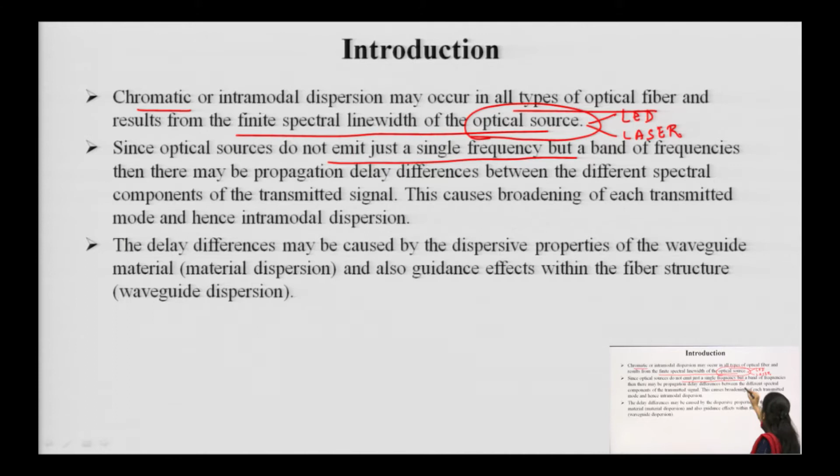Since optical sources do not emit just a single frequency but a band of frequencies, there is a propagation delay difference between the different spectral components of the transmitted signal. What does it mean? Normally any type of optical source does not emit a single frequency of light; it emits a band of frequencies. So, there always exists a propagation delay.

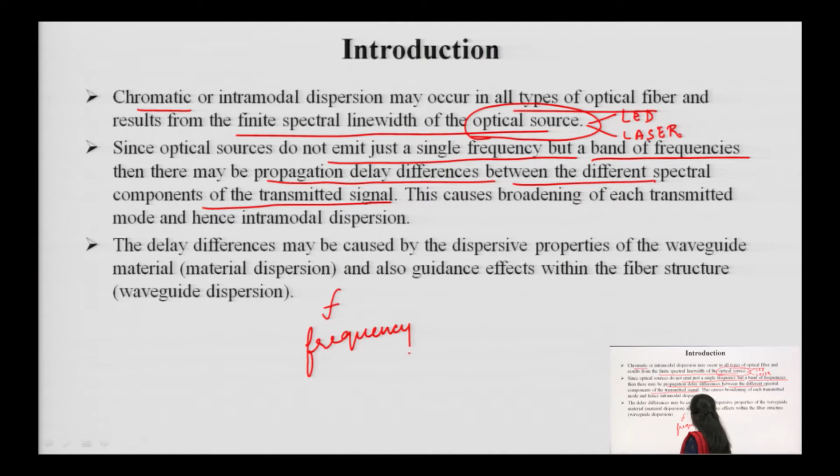As we know, frequency is equal to C by lambda, where lambda is our wavelength and C is the velocity. So, if there is a different frequency, then of course velocity changes as per that. If we have signals of different frequency, velocity changes accordingly, and as per that we have a delay difference, because distance is also related to velocity.

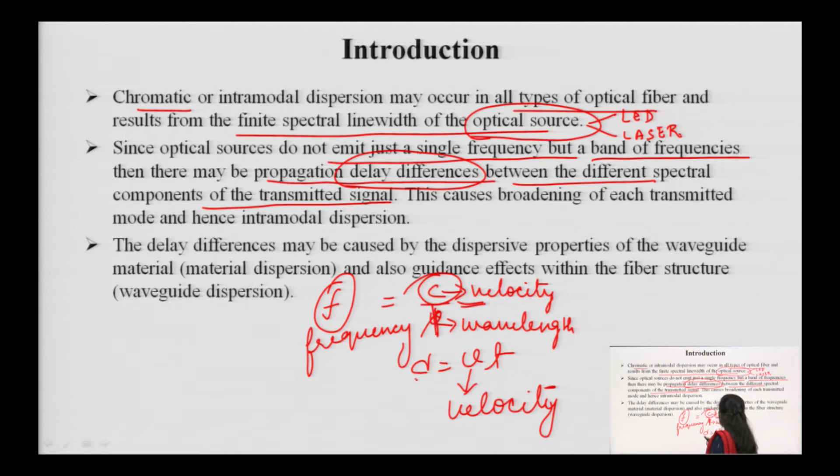In general terms, and in communication also, it is related to velocity, related to time, and distance is related to velocity. So, delay difference is also related to our velocity and in turn to the frequency. This causes broadening of each transmitted mode, and hence it is called the intramodal dispersion. Whenever there is a broadening due to this, it is called the intramodal dispersion.

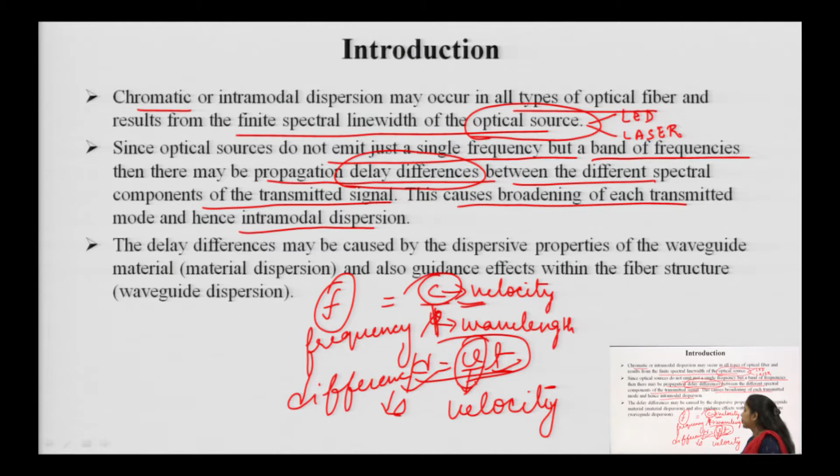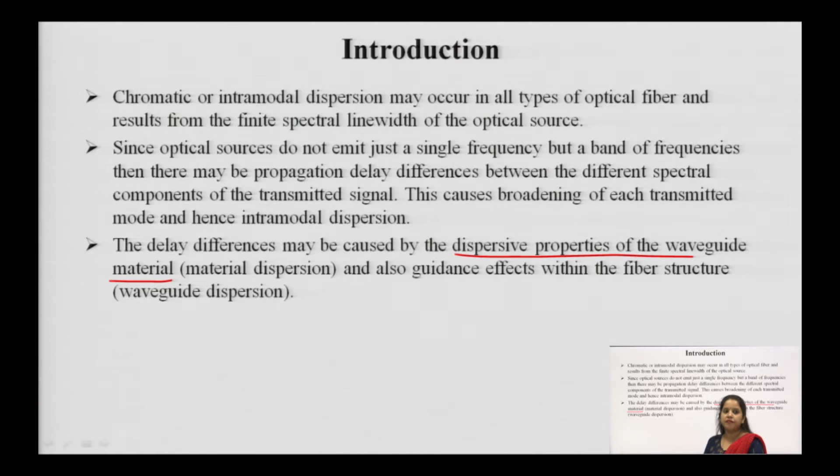So, dispersion delay difference may be caused by the dispersive property of the waveguide material, that is, the materials which are used have got some dispersive property, and if delay difference is caused by that, then it is called material dispersion. And if delay difference is caused by the guidance effect within the fiber, within the optical fiber more precisely, then that is called the waveguide dispersion.

Again, just a recap: intramodal dispersion is also called chromatic dispersion, and it occurs in all types of fiber, and it results due to the finite spectral line width of the optical source. So, the optical source is responsible for that. So, we have to choose the optical source by seeing its finite spectral line width, since optical sources do not emit a single frequency of light; they emit a band of frequencies.

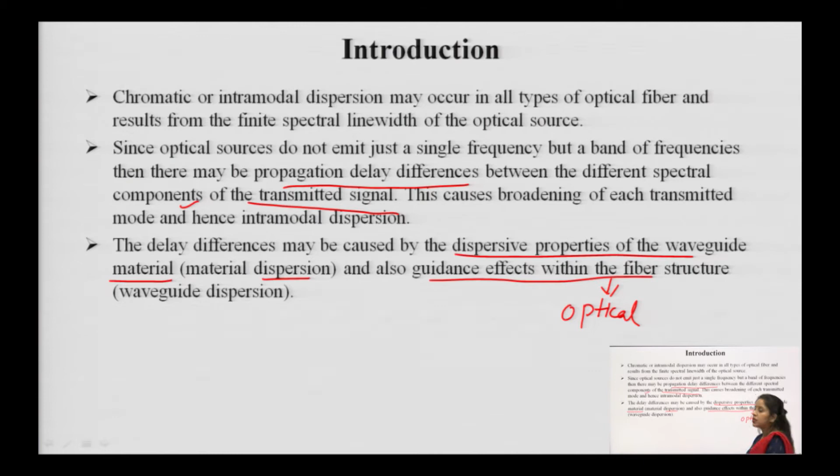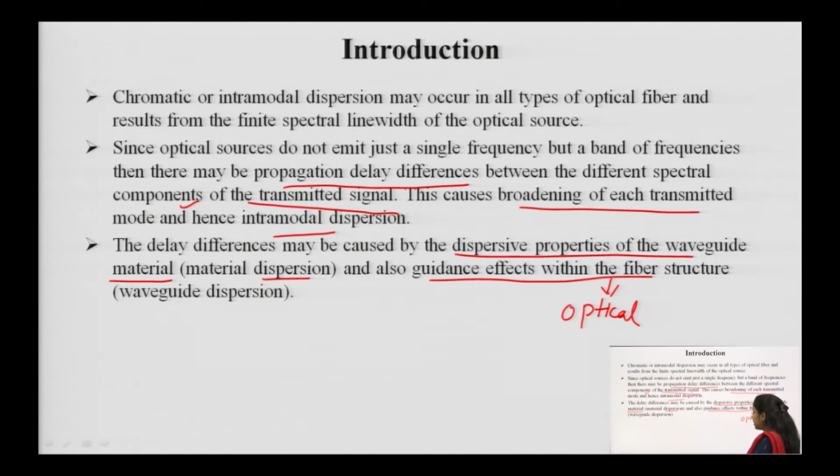So, there exists a propagation delay difference between the different components of the transmitted signal, that means different components at different frequencies of the transmitted signal, and this causes the broadening of each transmitted mode, and hence it is called intramodal dispersion. Whenever broadening occurs, this is a dispersion. It has got two types: the first one is material dispersion, and the second one is waveguide dispersion.

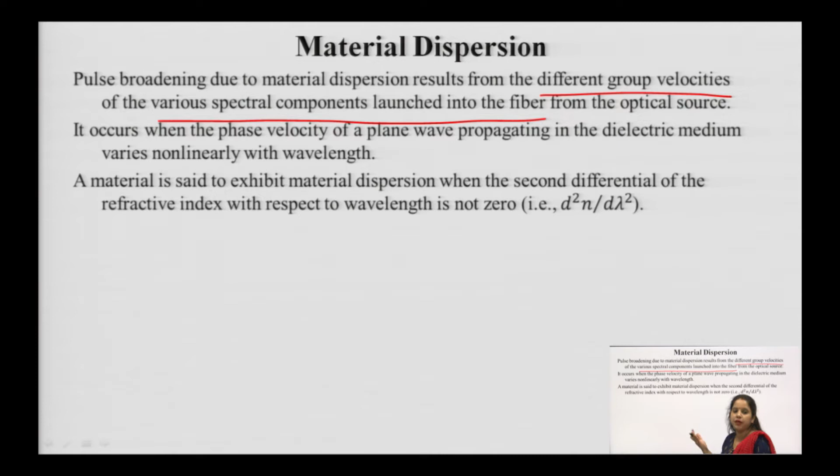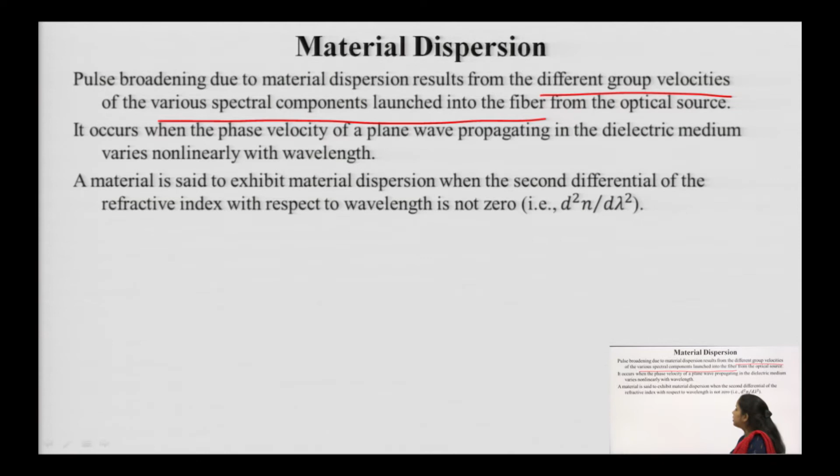So, pulse broadening due to material dispersion results from the different group velocities of various spectral components launched into the fiber. The light launched into the fiber has got different spectral components, and the group velocity of each is different; that leads to pulse broadening due to material dispersion. It occurs when the phase velocity of a plane wave propagating in a dielectric medium varies non-linearly with the wavelength.

So, again a condition arises that the phase velocity of the plane wave propagating inside the dielectric medium varies non-linearly with the wavelength. About the non-linearity and linearity conditions we have already discussed in the previous lectures. And one more condition: a material is said to exhibit material dispersion when the second differentiation of the refractive index with respect to wavelength is not 0.

That means, what is the refractive index here? Refractive index is given by this term, and the second differentiation, that means d squared n with respect to wavelength, should not be equal to 0. So, whenever any equation comes with respect to material dispersion, this condition is always applicable.

Now, let us get a knowledge about the pulse broadening, how much broadening is taking place due to material dispersion, what will be the value of broadening, that is, the value of dispersion, because the dispersion parameter can be measured with the help of pulse broadening only. So, we are going to discuss it for material dispersion, and this is a very important topic which you have to study carefully.

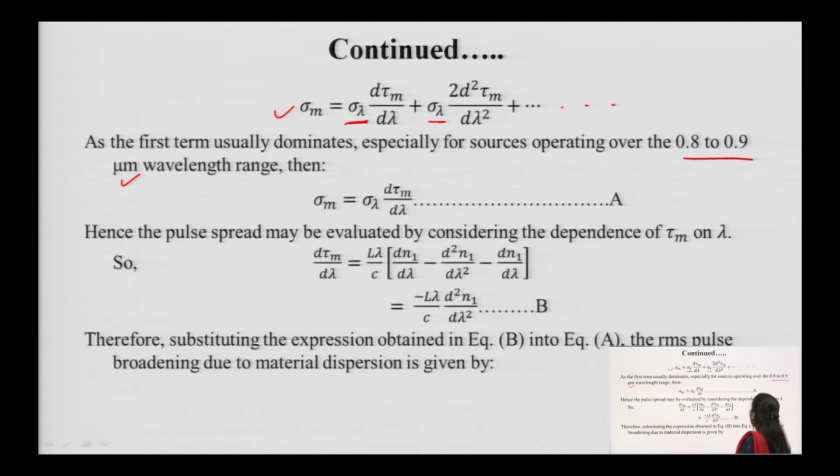This is the expansion in the form of a Taylor series, but the first term usually dominates, especially for a source operating over the range of 0.8 to 0.9 micrometer wavelength. So, we have taken only the first term and discarded the higher order terms. So, we get sigma m, our RMS pulse broadening due to material dispersion, equal to sigma lambda, the RMS spectral line width, times d tau m by d lambda.

Hence, the pulse spread may be evaluated by considering the dependence of tau m on lambda. Of course, tau m is dependent upon lambda. So, for calculating the pulse width, we have to differentiate tau m with respect to lambda. So, where is our tau m?

Tau m is this one. We have to differentiate this with respect to lambda. So, what we have to do? We have to take d upon d lambda, and what is the value? L by C, n1 minus lambda dn1 upon d lambda. L by C n1.

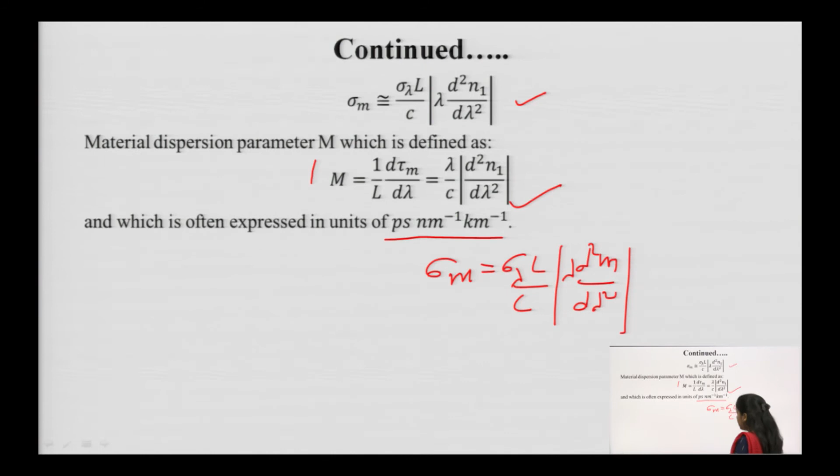So, when we substitute the value, we get this. And now one of the important parameters can also be derived from this, that is the material dispersion parameter, which is given by M, and it is equal to 1 by L, d tau m upon d lambda. So, again we have to differentiate tau m, which is here, and put it here, and we will get this, which is often expressed in picosecond nanometer inverse kilometer inverse.

Determine the material dispersion parameter, that means you have to determine M, at a wavelength of 0.85 micrometer. What wavelength has to be taken? 0.85 micrometer, and estimate the RMS pulse broadening per kilometer. You have to first find out the material dispersion parameter, and after that the pulse broadening per kilometer for a good LED source.

It has taken an LED source having a spectral line width of 20 nanometer at this particular wavelength of 0.85 micrometer. So, we are going to calculate the value of M and sigma m, and we already have formulas for these, and we are going to substitute. Now, using the formula, the dispersion parameter is given by M is equal to lambda by c, d square n1 upon d lambda square. But do we have a value of d square n1 upon d lambda square? We do not have a value of this.

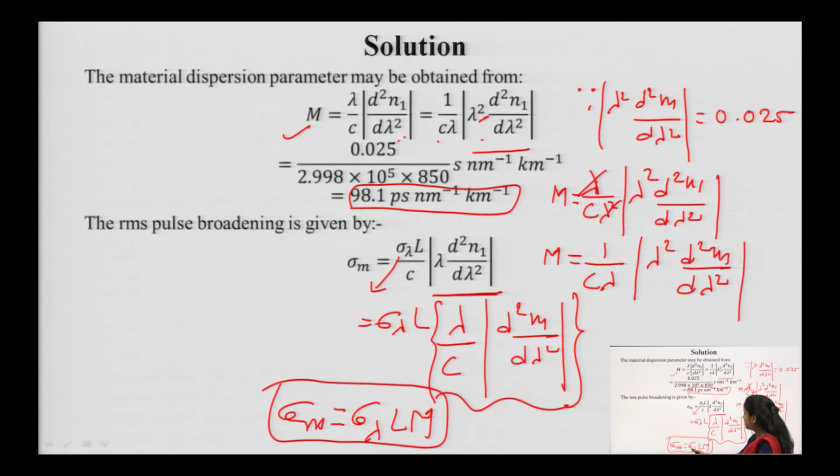So, our pulse broadening due to material dispersion can be written as sigma lambda L m, and all values are available with us. On putting them in, we get this one. This is our pulse broadening per kilometer. That is why L is taken as 1 here.

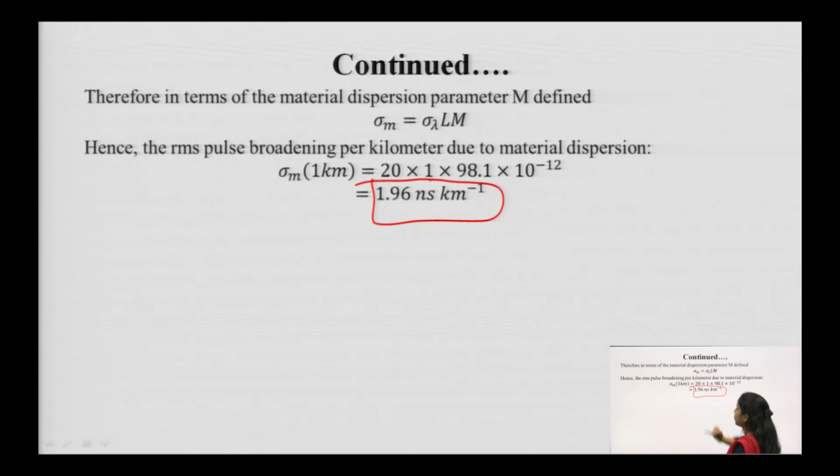Now comes the waveguide dispersion. Waveguide dispersion is a second form of intramodal dispersion. The waveguiding of the fiber may also create chromatic dispersion, that is our intramodal dispersion. It results from the variation in the group velocity with wavelength for a particular mode. Considering the ray theory approach, it is equivalent to the angle between the ray and the fiber axis varying with the wavelength, which subsequently relates to the variation in the transmission times of the rays and hence dispersion.

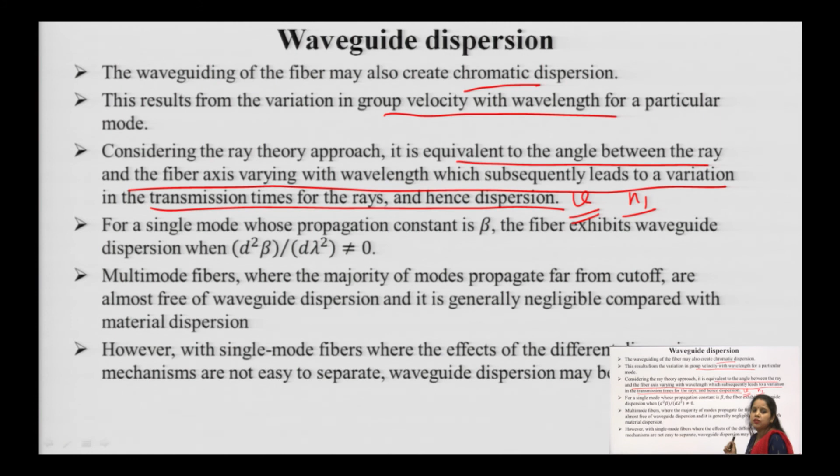What is this line saying? The angle between the ray and the fiber axis varies with the wavelength. It is already known to us that velocity varies with refractive index: as we change the refractive index, our velocity changes, and also wavelength is dependent upon velocity. All these parameters which are considered in the fiber are related to each other.

So, there is an angle with the fiber axis, and the angle at which the ray is incident keeps on varying with the wavelength, our lambda, and due to this all the rays reaching the destination have different group velocities, and that leads to the dispersion known as waveguide dispersion. And it comes under the category of intramodal dispersion, so this condition is also applicable for this one.

For a single mode whose propagation constant is beta, the fiber exhibits waveguide dispersion, and it has to follow this condition, which is the condition for intramodal dispersion. Multimode fibers, where the majority of modes propagate far from cutoff, are almost free of waveguide dispersion. It is either negligible or tends to 0 for multimode fiber. It is most prominent in the case of single mode fiber. However, with single mode fiber, where the effects of different dispersion mechanisms are not easy to separate, waveguide dispersion is significant.

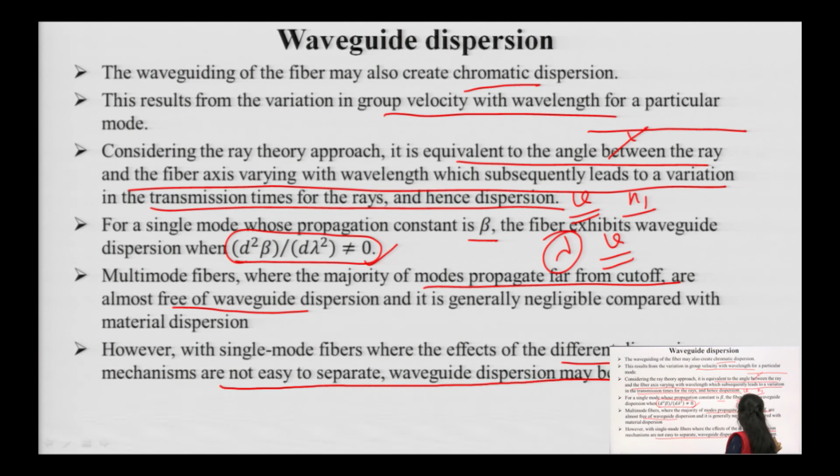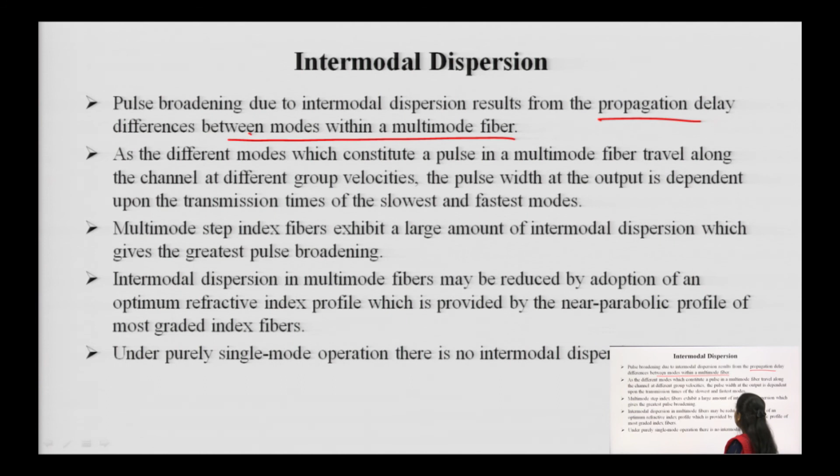Now comes the intermodal dispersion. We will consider the details of intermodal dispersion in the next lecture; today, just an introduction. Pulse broadening due to intermodal dispersion results from the propagation delay difference between the different modes within the multimode fiber. As the different modes which constitute a pulse in a multimode fiber travel with different group velocities, the pulse width at the output is dependent upon the transmission times of the slowest and the fastest mode.

As we know, we have discussed the different types of rays: axial, skew and meridional. The axial ray is the fastest ray and the meridional ray is the slowest one due to the path travelled by the different rays, and due to this difference, when these rays arrive at the destination, they have different timing. So, dispersion occurs due to this, as all the rays travel within the optical fiber.

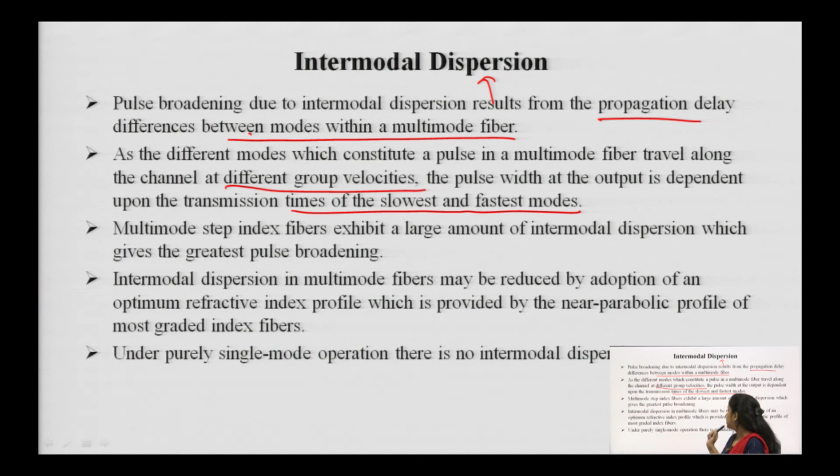So, we will go through the details of intermodal dispersion in the next lecture, which comprises intermodal dispersion and its propagation in the multimode graded index fiber and the multimode step index fiber, because intermodal dispersion does not occur in single mode fiber. In single mode operation, there is no intermodal dispersion.